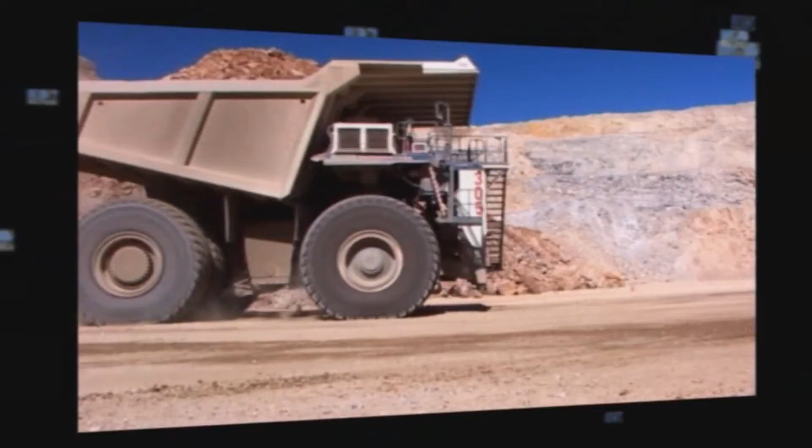It is estimated that almost half of engine downtime is due to coolant system failure. This is more than just annoying, because most coolant system failure is avoidable. And with today's diesel engines putting out more heat, cooling system care has become even more important than before.

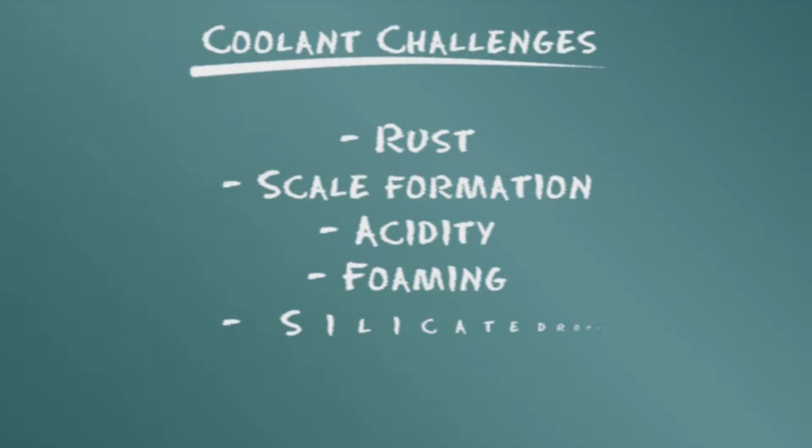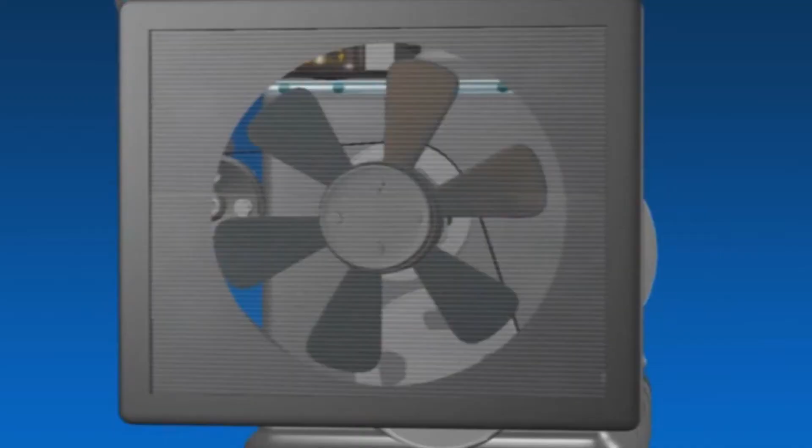Your engine coolant battles rust, scale formation, acidity, foaming, silicate dropout, and debris, while it works to transfer heat and maintain the right operating conditions for optimal fuel economy. Donaldson coolant filters play an important role by removing harmful contaminant which would minimize coolant effectiveness. But that's just part of the story.

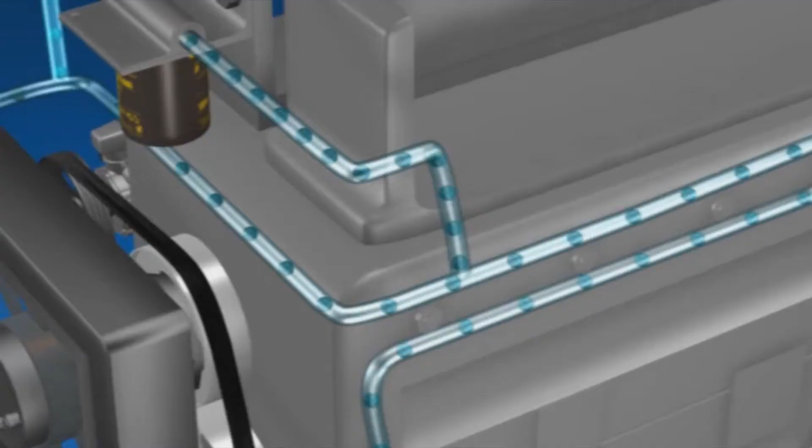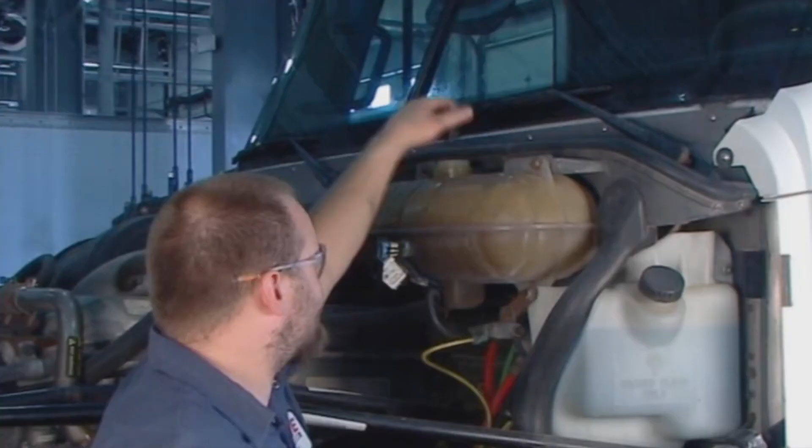Coolant systems are referred to as a closed-loop system, with the filter operating in a side loop to the system. This means that a small percentage of flow goes through a filter that is designed to capture large contaminants. Periodic drain and flushing to clean a system is important because while coolant filters capture large contaminant and release additive chemicals into the system, sediment can accumulate in the coolant system. These sediments act as an insulator, keeping heat in and preventing heat dissipation.

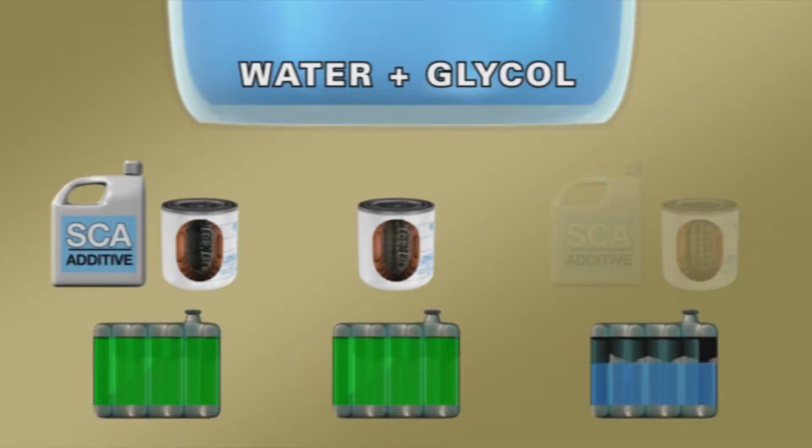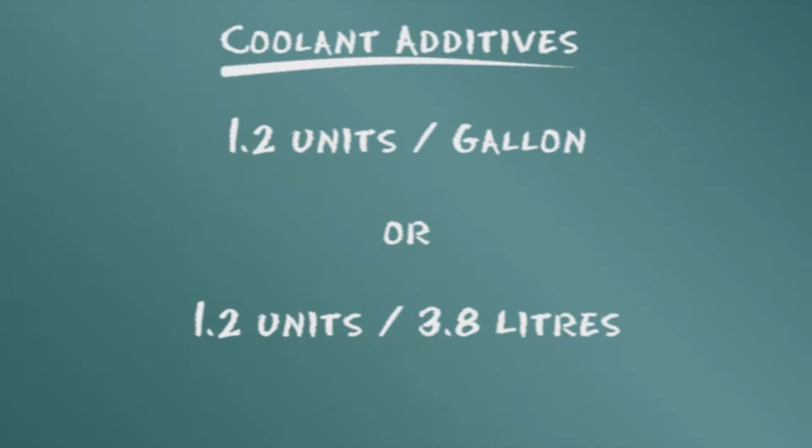Coolant systems, which are a mixture of water and glycol, can be maintained in three ways. You can use a concentrated liquid additive with a non-chemical or blank filter, a coolant filter containing solid concentrated additive pellets, or a combination of both for larger systems. After the system is initially charged with supplemental additives, it is maintained at a level of 1.2 units supplemental additive per gallon, or about 3.8 liters of liquid in the system. This is done through the use of liquid additive or coolant filters with various levels of additive inside.

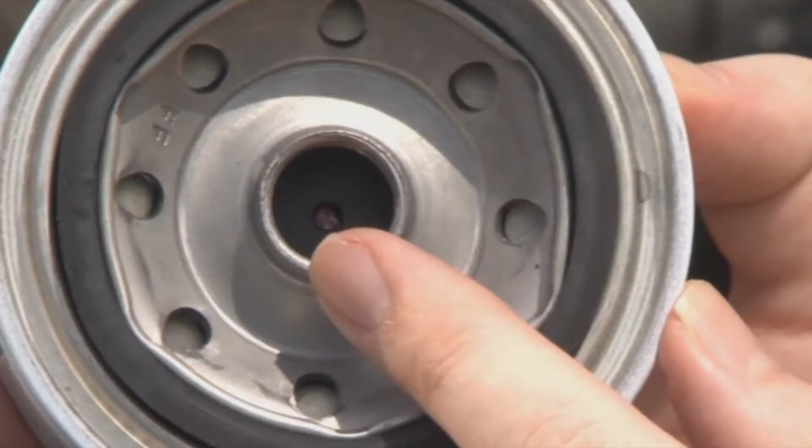By removing contaminant from the system and maintaining this important chemical balance, Donaldson supplemental coolant technology is designed to eliminate engine overheating issues, reduce engine downtime, and lower operating costs. Other items in the Donaldson coolant product series include bulk sizes of SCA in various quantities, from handy bottle-size containers to drums for supplementing your coolant additive package.

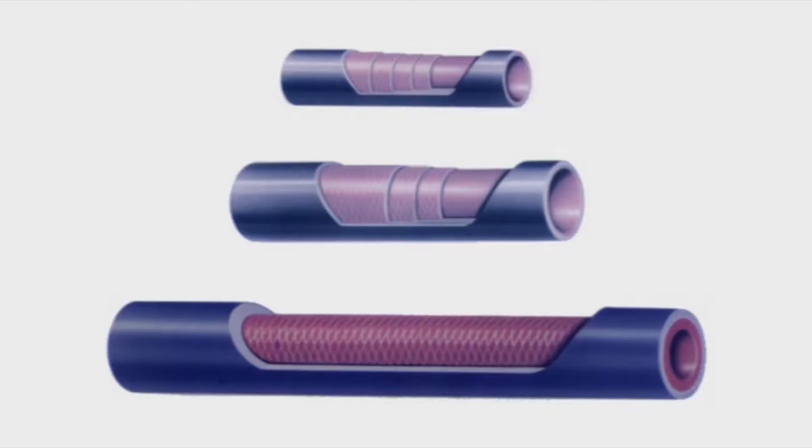Donaldson test kits offer a quick 1-minute test that helps you maintain your cooling system chemical balance. And our product line includes durable high-quality silicone hose and clamps. Silicone hose resists hardening, cracking, cold leaks, and aging, and is ideal for extreme temperature and pressure ranges. Donaldson coolant filter technology allows you to choose the method that suits your maintenance practices and schedules.

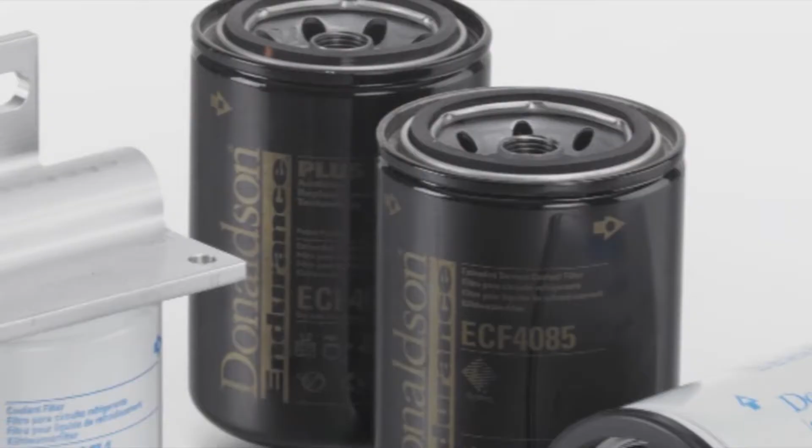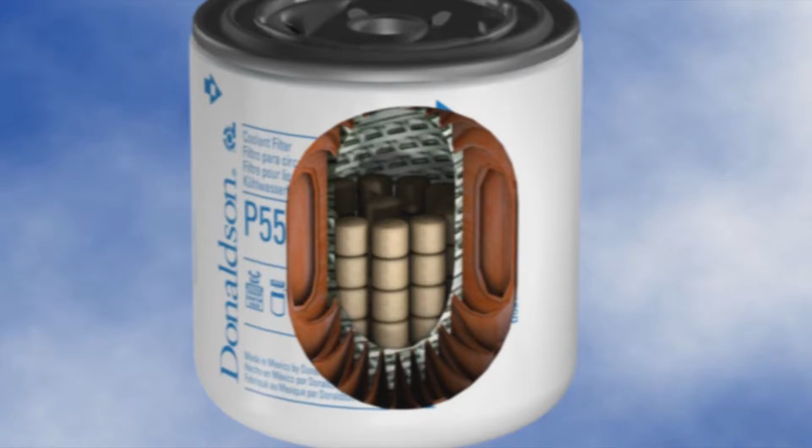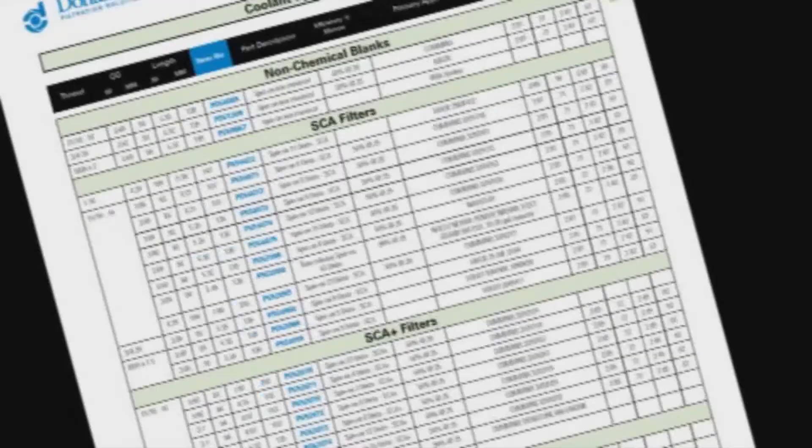There are 4 Donaldson coolant filter types available. The pre-charge filter contains enough coolant additive to initially charge the cooling system and to allow for depletion to the first service interval. The standard charge spin-on filters contain adequate chemical additive to maintain cooling systems between service intervals. Use of the correct SCA type filter is important to prevent overconcentration, known as silicate dropout, or underconcentration, which leads to corrosion, liner pitting, or other system problems.

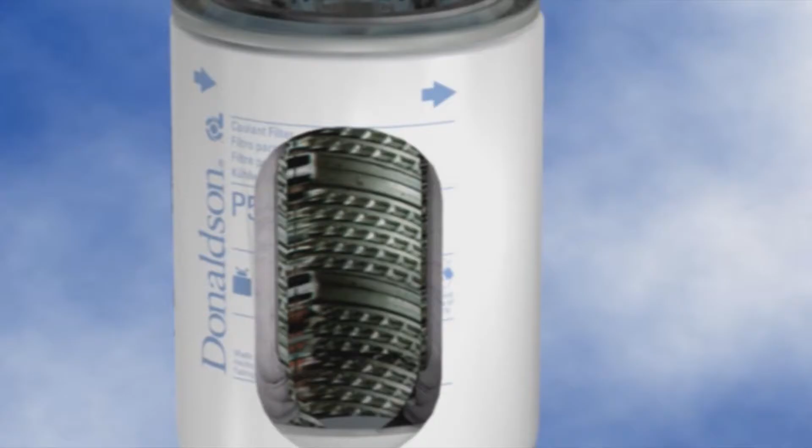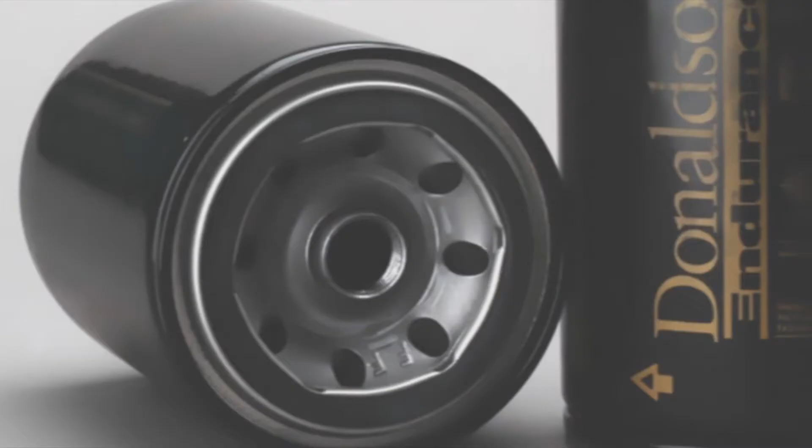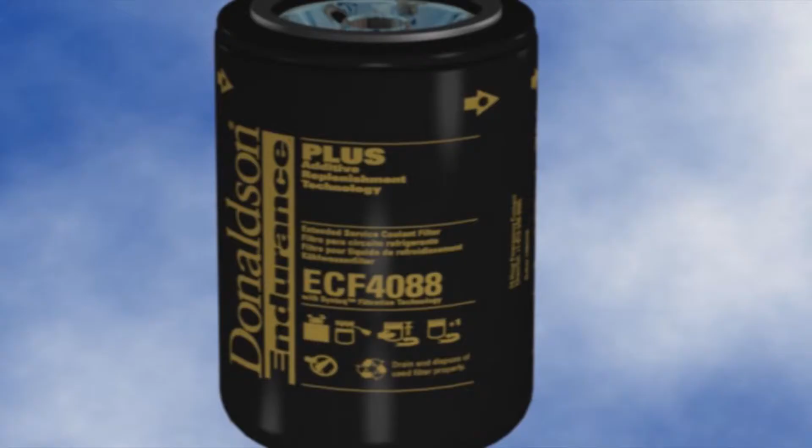Blank filters, which contain no chemical additive, can be used for cooling systems maintained by liquid additive. They can also be used on overcharged systems to bring the additive level back to a normal range. For extended service systems, Donaldson Endurance blank filters should be used, as they have extended life components. Blank filters are not intended to be used with water-only systems. The 4th type is the Donaldson slow-release spin-on series, which releases small amounts of additive into the system over a period of time to maintain proper additive levels.

Let's talk about the additives and note that the technology in Donaldson SCA filters is different from the SCA Plus filters. So what are the SCA chemicals and how do they do their job? Nitrite is the key chemical component in SCA cooling system treatment. Nitrite provides protection against cavitation, erosion, and inhibits corrosion. Nitrite also oxidizes into nitrates, which provide corrosion protection to aluminum and solder. Borate functions as an alkaline buffer to prevent acidity and control pH.

MBT provides a plating effect on all copper and copper alloys, protecting them from direct contact with coolant and oxygen and subsequent corrosion. Silicate reduces corrosion of ferrous metals and is an effective aluminum corrosion inhibitor. While the chemical composition of SCA+ cooling system treatment features some of the same chemicals, there are differences. Molybdate and nitrite are combined to provide cavitation erosion protection and inhibit corrosion. Phosphate functions as an alkaline buffer to prevent acidity and control pH.

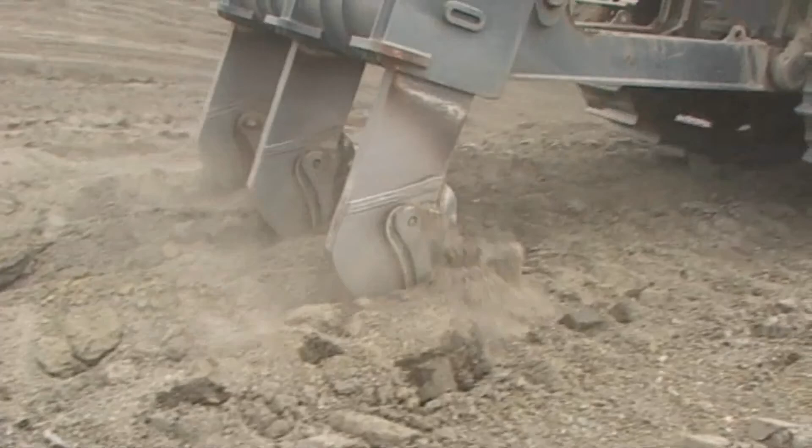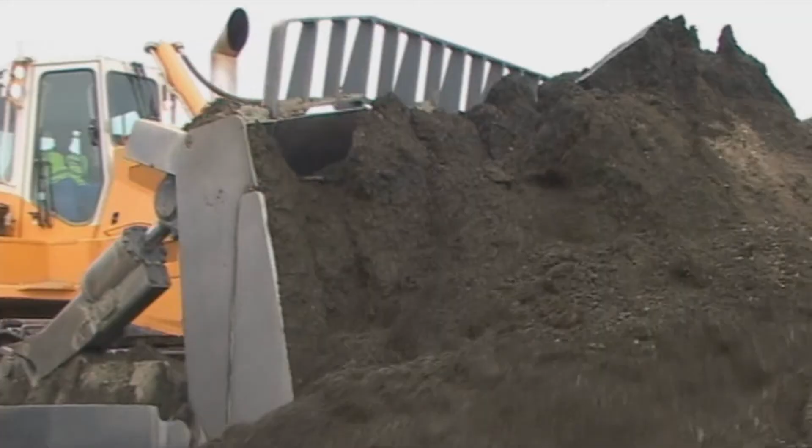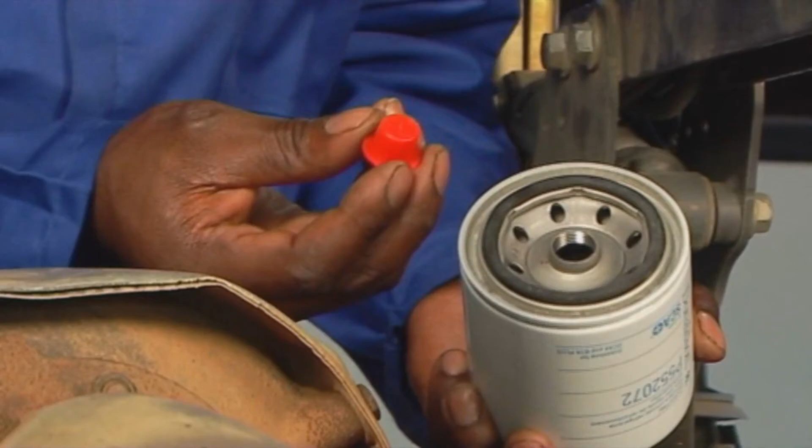Donaldson coolant filters are designed to work in a wide variety of operating environments and meet the service requirements of the majority of heavy-duty diesel engines. The Donaldson-produced spin-on has 3 heavy-duty features: a thread plate profile for strength, rolled threads which are cleaner, and the robust full tuck seam for extra durability. The Donaldson tapered thread profile simplifies installation and prevents cross-threading. Not all filters have a seal between the thread plate and end plate. Donaldson's seal is constructed of molded elastomer, which is designed for extreme cold and heat.

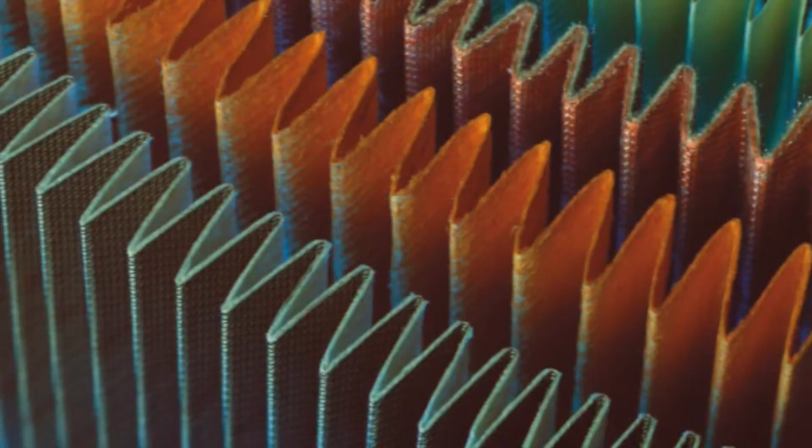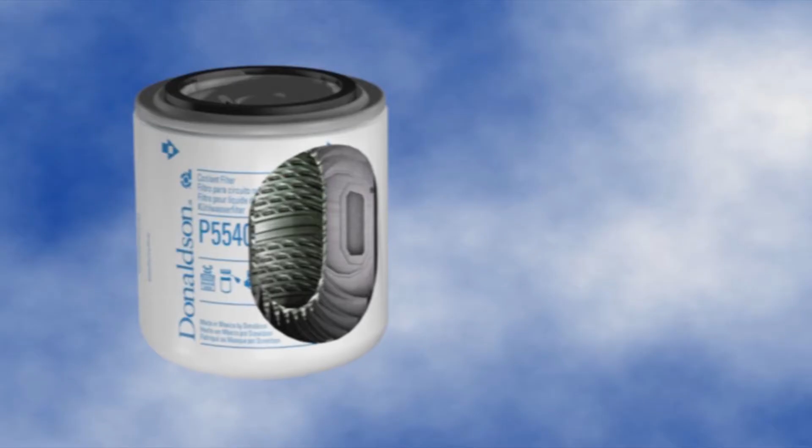Donaldson filter media is carefully cured because curing is the process that adds strength to the filter media. Donaldson can exercise control in the manufacture of filter media because we design and specify our own media. Uncured media has very low strength and can rupture easily when saturated with coolant. The Donaldson additive filter design has 2 special additional items: the additive package and the orifice grommet, which controls the release of the additive package into the cooling system.

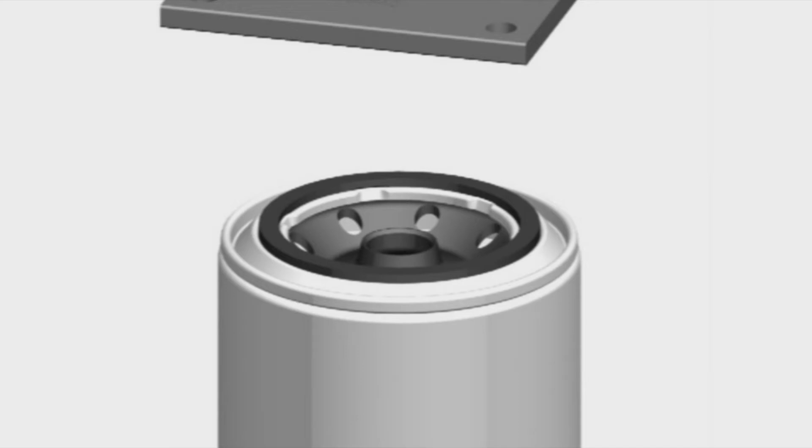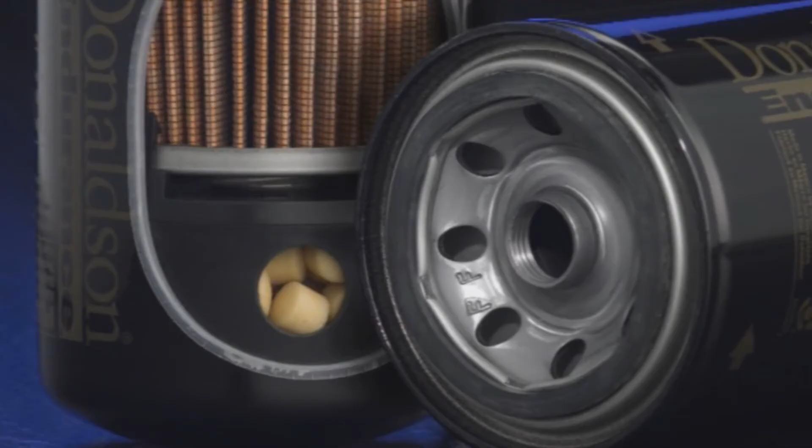In situations where you want to equip a vehicle with a coolant filter or need a replacement for an existing coolant filter head, the Donaldson remote mount head can be mounted to the firewall or some other off-engine location. There are many situations where longer service intervals make good economic sense. You could select Donaldson Endurance non-chemical filters, which will go the distance of your coolant. Or you could choose the Donaldson Endurance Plus coolant filter series with additive replenishment technology and Synteq filtration media, which is more effective than standard cellulose filter media. They have the increased capacity to allow greater extended service intervals.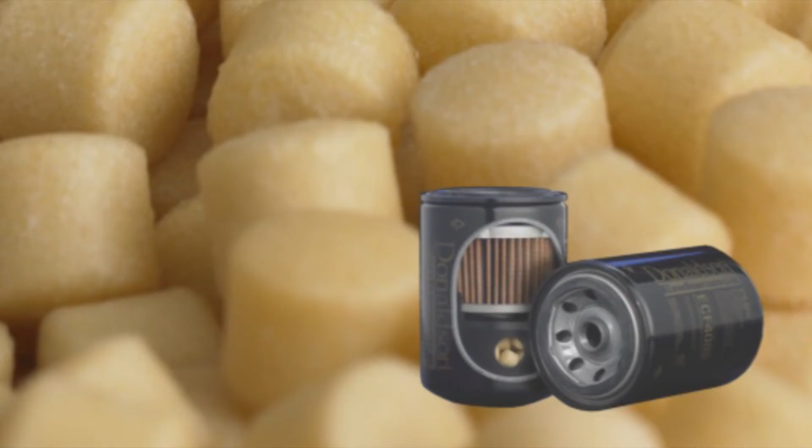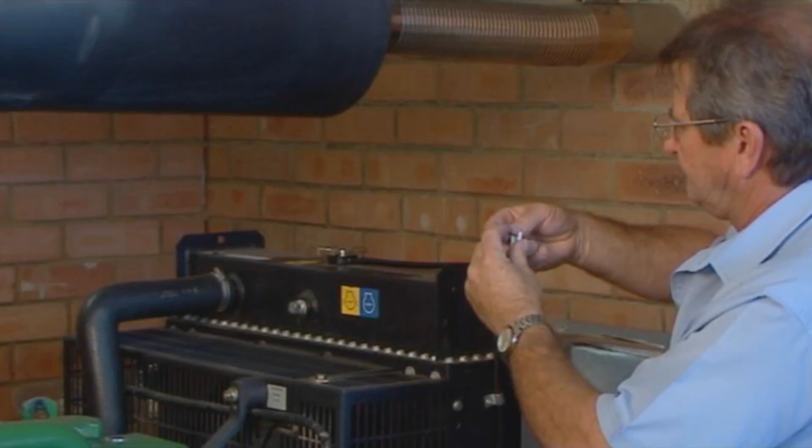Donaldson Endurance Plus allows you to extend your coolant maintenance interval up to 1 year, or 150,000 miles, which is 240,000 kilometers. The time-release additive replenishment built into the Endurance Plus filter with advanced Synteq media maintains healthy coolant condition over long periods with improved coolant flow. Even with extended service coolant additive technology, coolant testing is recommended by engine manufacturers each time you bring your vehicle or equipment in for regular maintenance. Besides testing coolant chemistry, coolant testing can reveal a developing problem, such as an engine gasket that is beginning to leak.

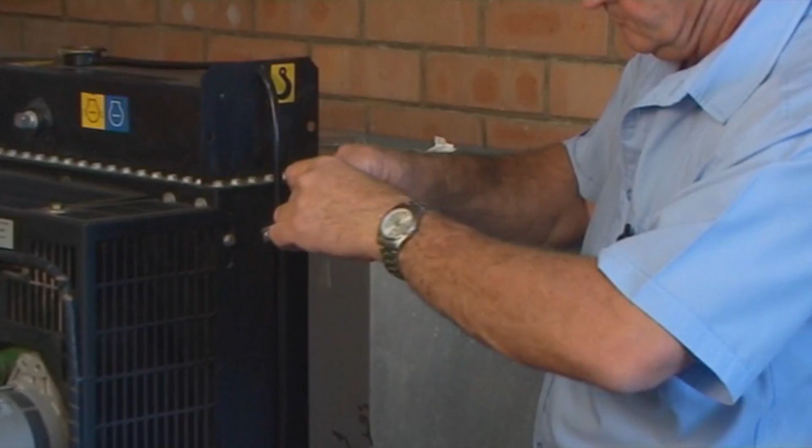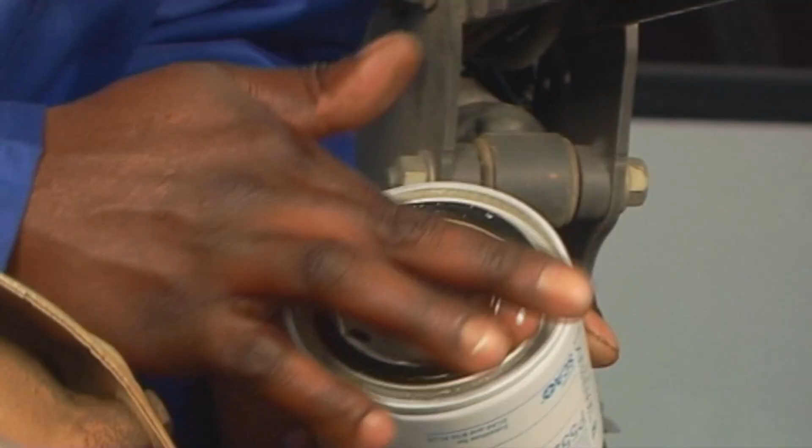In Companion Training Module L3B, we'll show you how to test coolant and use additive filters and/or coolant additive to maintain coolant effectiveness levels. We'll also give you coolant system maintenance tips and filter change-out steps. This servicing information is provided as a best practices guide. It is not, however, intended to replace or supersede the service instructions supplied by your engine or vehicle manufacturer.